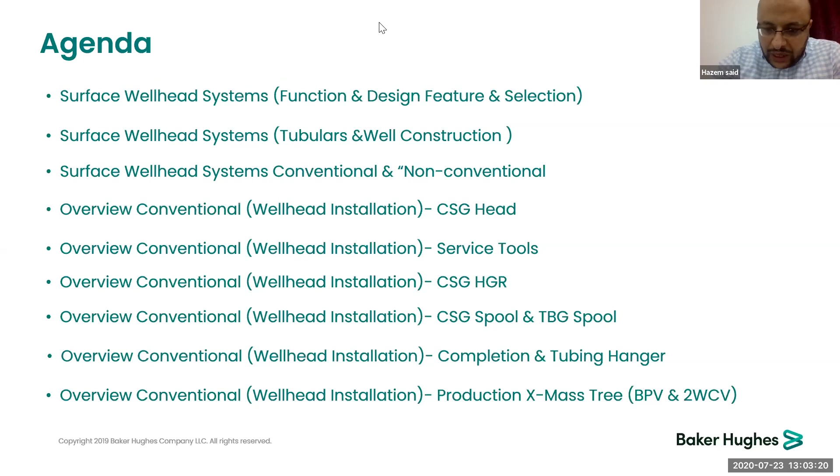So, surface wellhead system function and design feature. What is a surface pressure control, or what is a surface wellhead means? What does a surface wellhead look like? We have two main types of wellhead. We have something called surface wellhead, and we have another one called subsea wellhead. So the wellhead is whether it will be on the surface or it will be on the seabed.

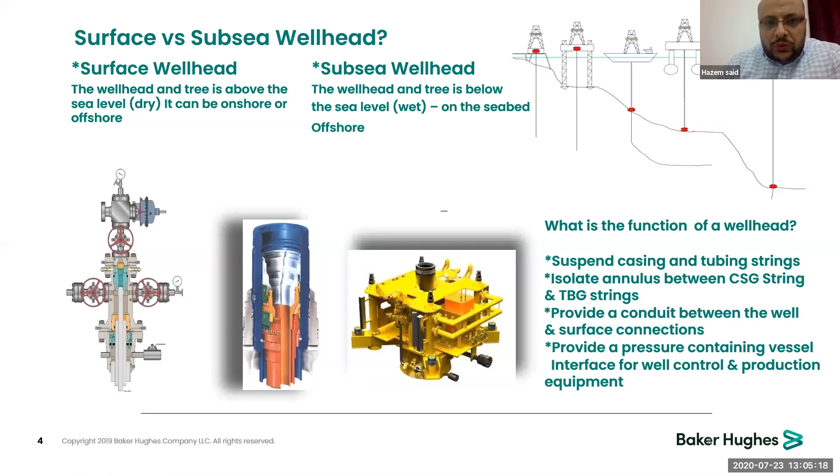What is the function of surface wellhead? The function is to suspend the casing and provide a conduit for surface connection, provide a pressure containing vessel interface for control and production equipment. So this is the main function of your wellhead. This is like a door for your home. You will not be able to go inside your drilled well without passing through this wellhead. So it's your door for your home. So this is what we see, or what we know, or what we try to call surface wellhead.

How does this wellhead look like? The wellhead has a design feature. You will know this wellhead by its feature. So the main design feature for wellhead, whether it will be flanged wellhead, like the one on the left-hand side, or clamped connection like the one on the right-hand side, you will find a clamped wellhead part. Or it will be multi-bowl wellhead, which is on the right-hand side, or stacked wellhead on the left-hand side, meaning that one by one you will find your wellhead. This is the first part, second part, third part, and we install it one by one. The multi-bowl means it will be one piece.

Whether we will find it's a slip hanger or mandrel hanger. Mandrel hanger usually is the one used into the multi-bowl wellhead. The slip type is the one used for the stacked wellhead. Even in some troubleshooting, we use this slip type hanger into the multi-bowl.

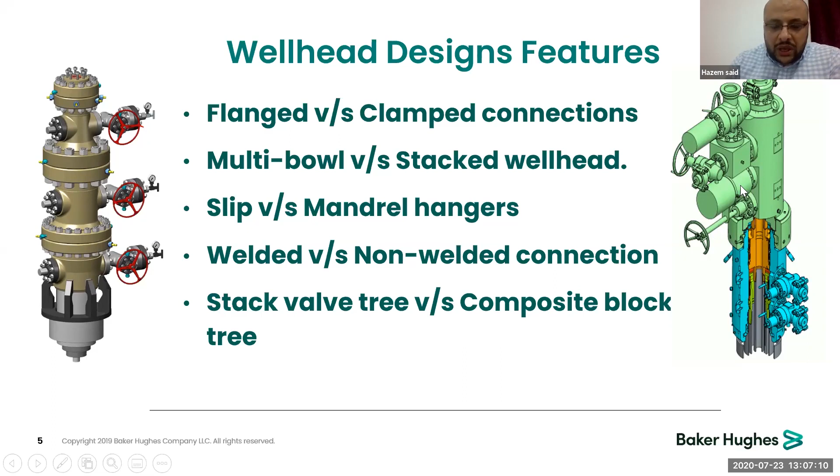We have also welded wellhead and non-welded connection. So there is some connection welded, and the other connection is non-welded as well. So you have the stack valve like this one, and we will understand what is a stack valve tree and composite block tree like this one. We will go through it while we go through the slide, inshallah.

So after the features, you need to understand one important thing: wellhead selection. What is it based on? Which basis do I need to know, or what criteria should I go through to decide the wellhead for my company or for a customer, whatsoever? So the selection is based on a lot of aspects here.

First, casing program. The casing program, which the customer or the company puts to drill the well, is one of your important data to decide your wellhead selection. What else? Weight and grade of this casing is very important to know while I choose my wellhead. What else? Total length of each casing - for how long I will drill each section of the well.

The bit program, anticipated produced fluid - all of this stuff, or all of these aspects, is very important while I choose my wellhead.

What else? Anticipated pore pressure. So you know each zone, or each pay zone, or each number of layers, has a certain pore pressure. This also needs to be understood, so you know where your casing is set, and that's why you will know what is the pressure rating for your wellhead - is it 3K? Is it 5K? Is it 10K? And so on.

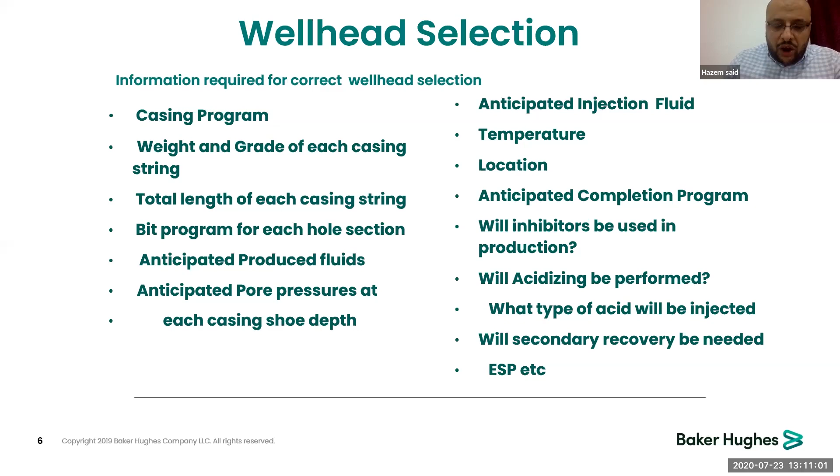So what else do I need to understand here? We will speak about tubular and well construction. These are the main three tubulars used in the oil and gas industry. The understanding of these three tubulars is very, very important for the surface wellhead industry, because it's associated with your wellhead, and your wellhead is connected - whether it's connected with this casing, or you run through this casing, or you seal around this casing.

Also, regarding the drill pipe, your running tool will be installed by this drill pipe or retrieved by this drill pipe. So you need to understand the weight, grades, connections, and lengths which you are dealing with, so you anticipate and put your wellhead design correctly from the beginning.

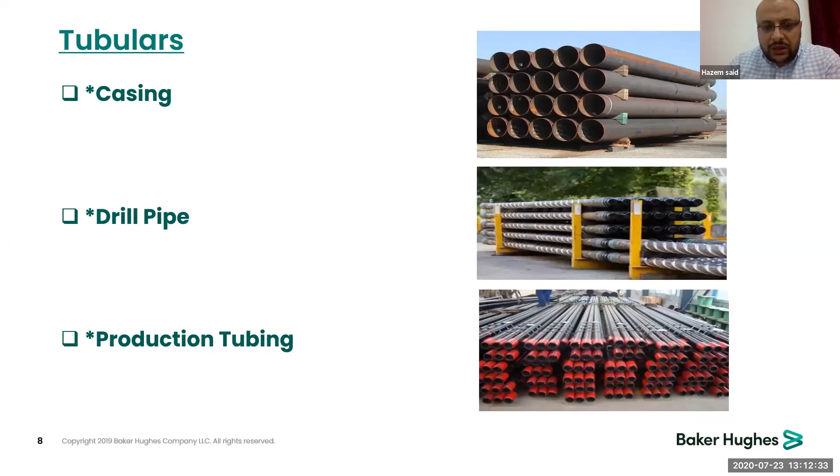Usually you start your well with conductor casing, which is a driver pipe. Then you go for the next phase with the surface casing. You need to understand this naming: conductor, surface casing, intermediate casing, and production casing. Why? Because each part of this casing will be attached to one part of the wellhead. Surface casing connects with a part of wellhead, intermediate casing connects with another part, and production casing connects with another part.

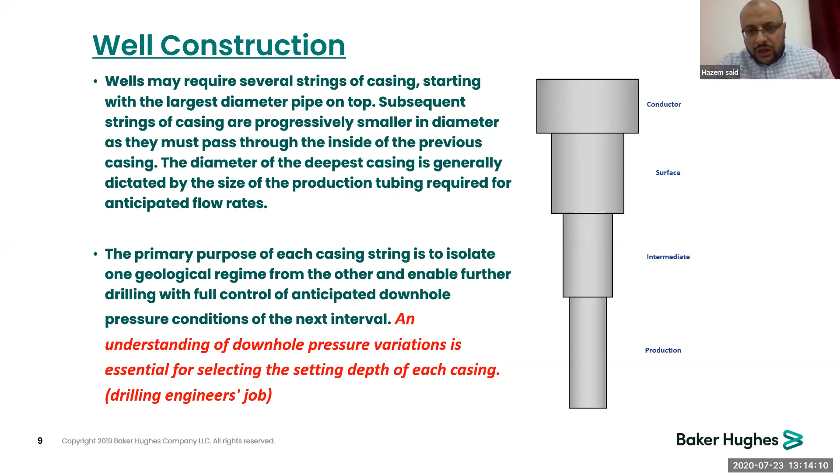We will see how we actually build the well through the wellhead, through drilling phases, because we do our well in phases: surface, intermediate, production, and set our casing. At this stage, we connect or add our wellhead part to this casing. That's why it's very important to understand what casing you're dealing with - the weight, grades, types, material, all of this - because it's very essential for the wellhead part.

In wellhead systems, you will hear about conventional wellhead and non-conventional wellhead. What does this mean? Conventional wellhead means it's a basic wellhead, like you see on the left-hand side. Each part of the wellhead will accommodate one casing string.

This part, called casing head housing, will accommodate surface casing. This part, called casing spool, will accommodate intermediate casing. This is tubing head spool, which will accommodate production casing, and so on.

While in non-conventional wellhead, your wellhead parts on the right-hand side will accommodate 2 or more casings in one go, in one port. If we focus here, you see this part has 2 casings - the surface casing and the intermediate casing - in one go, in one shot.

This is to stop manipulating the BOP, so you are not changing your BOP between each stage. I will explain, when we go for the overview, how this will look in the normal or stacked conventional wellhead versus the multi-bowl or non-conventional wellhead.

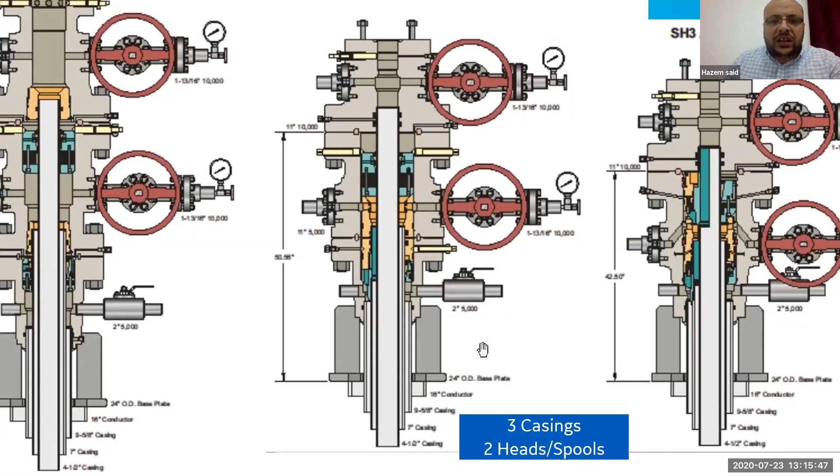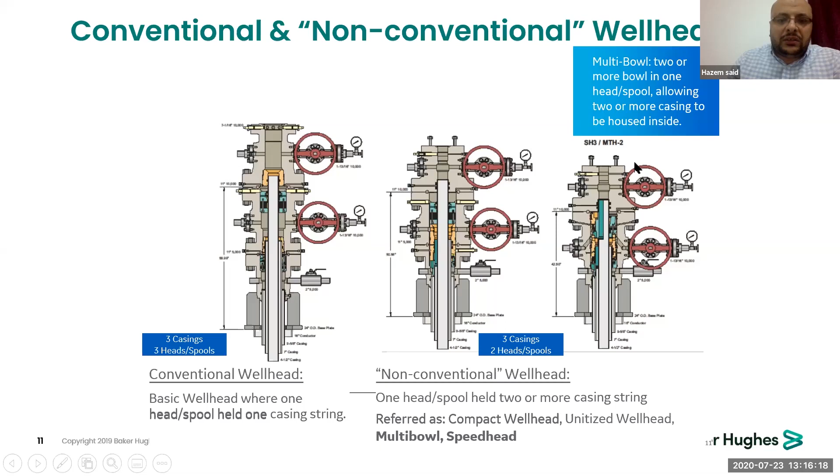So this is the main understanding of multi-bowl wellhead. There are other names also in the wellhead industry or oil and gas industry. We name this multi-bowl, compact wellhead, unitized wellhead, multi-bowl, speedhead - all of these names are known as multi-bowl wellhead, or non-conventional wellhead.

Conventional wellhead consists of these parts. This is the one usually installed in the majority of oil and gas companies. This is the old style - it started with the beginning of the oil and gas industry, and it still exists in a lot of countries. It's very suitable for oil wells or low cost wells, because multi-bowl is usually an expensive wellhead.

So what are the parts of this wellhead? We have the casing head, we have the casing hanger inside here, casing spool - this is the second part, secondary seal, internal here in the casing spool - tubing head spool, which is the last part on top. You have single tubing hanger or dual tubing hanger based on your pay zone, how many pay zones you have. As I mentioned, you need to anticipate the drilling program and some associated service tools. These are the main parts in conventional wellhead.

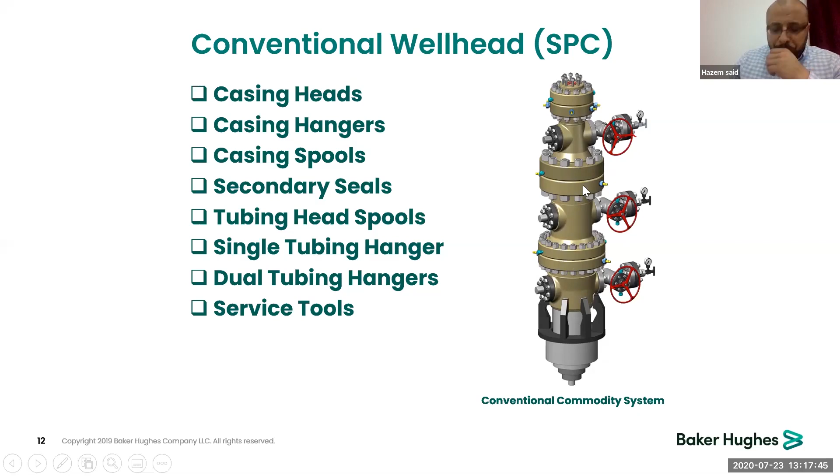So now we will go through an overview of conventional wellhead and wellhead installation. We will start with the first part, which is casing head, and this is the name of it. Now, where will my casing head be installed?

As you see here, how you start your well on the left-hand side, you start by digging the cellar, the one outside here. Usually your wellhead is similar to this. Your main wellhead part will be down the cellar and the Christmas tree at the ground level, as you see here, allowing the operator easy access to operate the Christmas tree for production, rather than having the wellhead on this ground.

On the ground, this operator would not be able to easily operate the Christmas tree and the production valves and all of this stuff. That's why all of this is important. So you can consider the cellar's function is to accommodate all the parts of the wellhead before you install the Christmas tree. This Christmas tree is the most famous part of the wellhead, and it's what the majority of people in oil and gas know about the wellhead. They only know about the Christmas tree, not what is inside below the ground level, because it's not noticeable at all.

So how do we start our well? As we mentioned, we are running our conductor pipe. This one is the conductor pipe, installed into the ground. How is it installed? Usually it's drivable, hammered into the ground, until it reaches something called the refusal point. When the conductor reaches the refusal point, I'll stop and continue building or drilling my well and installing the next part of the wellhead.

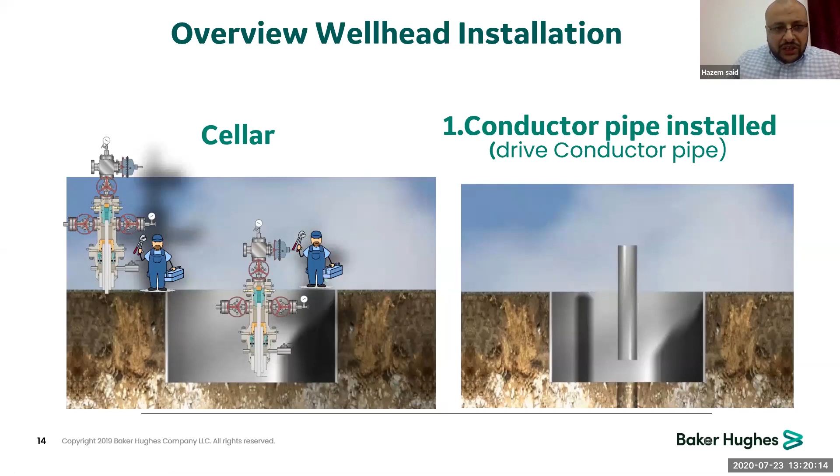So how does this look like? After I install the conductor pipe, I go drilling, same as on the left-hand side right here.

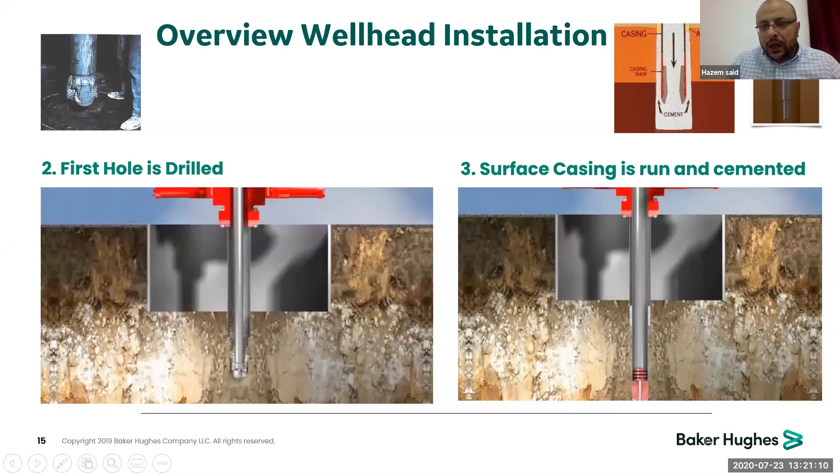We install surface casing, then we do a cement job. Once you cement your casing, you will remove this BOP. As you see here on top, this is the conductor, this is the surface casing, it's blue, the conductor casing. Once we finish the drilling and cement, we will cut the casing.

We will cut the casing and install the first part of the wellhead. This cut and arrangement actually has some mathematical aspects and some coordination with the rig side and the customer side. This is usually installed by field operations or a specialist for wellheads, who ensure this part of the wellhead is installed properly, using some specific techniques while installing this.

So once we cut the surface casing, we install the first part of the wellhead, which is called the casing head housing. There are other names for this casing head housing in the industry. It's called starting head, bradenhead, or section A. These are names which, when you hear them, mean the first part of the wellhead.

Don't confuse it - the wellhead is all the parts below. Which section are we speaking about? If we're speaking about section A, we're speaking about this part, the casing head housing. The function of this casing head housing - and this is the real casing head housing on the right-hand side - usually it has a side outlet like here, because you need access to this annulus to monitor the well and make sure that it's sealing properly.

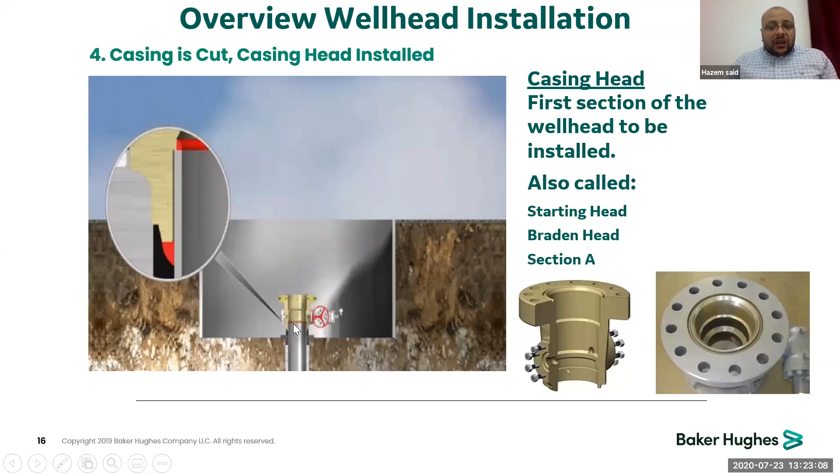How do we attach or connect this casing head housing with the casing after we finish the surface casing? Now, as you see, this is installed after the cement, because you are securing your well with this cement and removing your BOP to be able to install this part. So we have different types of attaching or connecting this casing head housing with the casing.

Whether it will be welded - you have slip-on weld, SOW, this is slip-on weld. Also there is something called slip-on weld with O-ring in some cases, but the majority is welded, because you weld this wellhead to the casing. This is how it's installed.

You weld this casing wellhead to the casing, or in some other application you connect this wellhead by threads, as you see here. So this is a different application rather than welded. What else? We also have other applications called connectors, slip lock, or sure lock, where you have a certain locking mechanism. There is a kind of segment, Allen keys and this stuff, to connect this casing head housing with the casing.

So there are three main styles: one, slip-on weld, so I weld the casing head to the casing; or I thread the casing head housing with the casing connections; or I cut the casing and it will be connected with another mechanism like slips. Some segment will go around this casing and attach onto it, and there will be a certain Allen key or stud engaged here, so it will be connected.

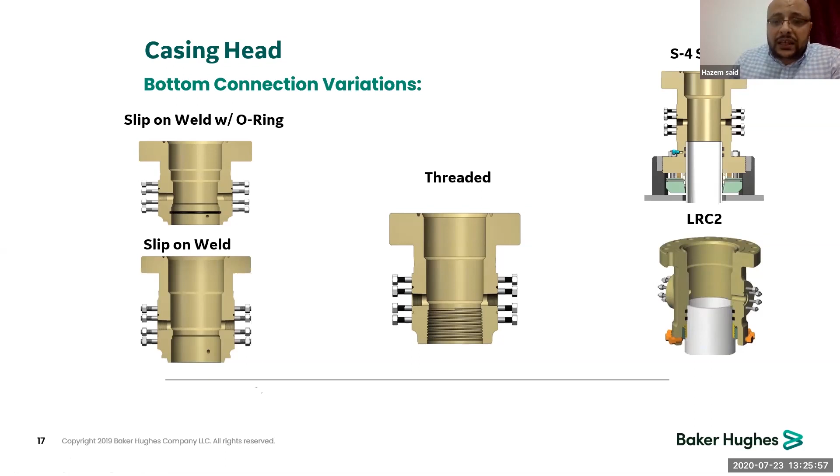What you see here is model LRC2 S-4 sure lock. This is just one model; you have a lot of models in the industry based on the manufacturer producing this equipment, but the methodology will be the same. It will be latch lock. You will not use any heat or thermal welding in this style.

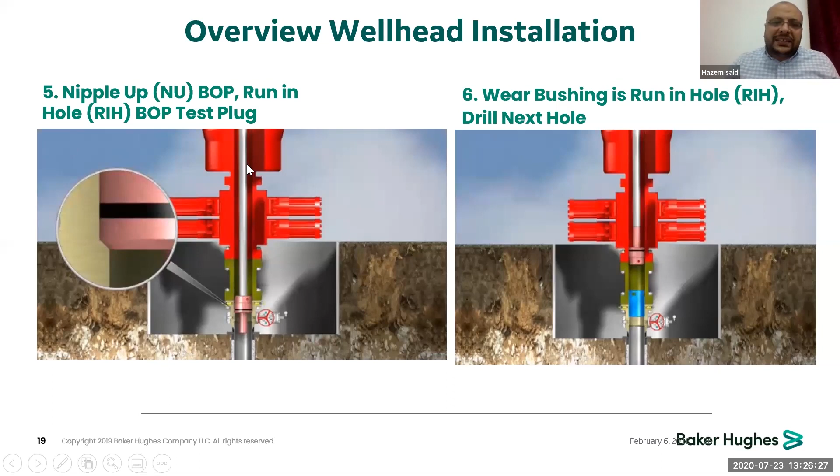Once we install this part, we are running, and we will need to return to continue our drilling phases. We weld our well and weld our wellhead. So now you're changing the phase. You need to put the part of the wellhead which will be attached. How does this happen? You will return the BOP onto your casing head housing.

And you need to check the integrity of this BOP. How do you check this integrity? You need to test the rams - shear rams, pipe rams, and so on. So there is a service tool called a test plug, as you see it here.

This test plug will sit into your wellhead. It means my wellhead will have the place where the test plug sits, so I can test this BOP and continue the drilling. I make sure of the integrity of this wellhead and BOP while drilling, so my drilling will be secure - there is no safety issue or well control issue.

So once we test this, we will need to install something called a wear bushing. It comes from its name - the wear bushing is used to secure this part of the casing head housing until you install the next phase, because we will install some part inside here.

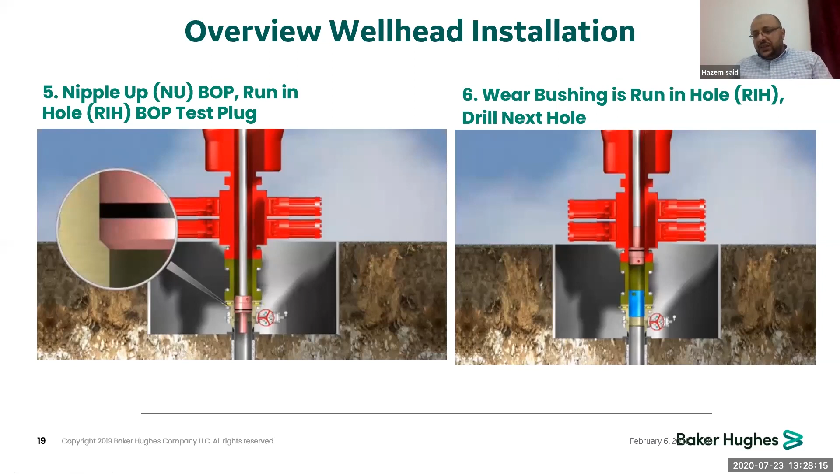So how do we install this wear bushing? In a lot of cases, your test plug is named a combination tool, or it performs another function, and you install this wear bushing with your test plug, leave it here, then remove the test plug. Why? Again, we put this wear bushing here to secure this area while we are drilling the next phase, which is intermediate casing or production casing as per the drilling program.

Here you see how this test plug looks. Your test plug usually has a drill pipe connection, and that's why I'm telling you from the beginning, this is the main tubular which you need to understand, because when designing this BOP or test plug BOP, it will be connected to the drill pipe. It will be run into the casing housing by drill pipe.

That's why you need to know what drill pipe is available. You will need a crossover, different connections - how it will be connected, how it will be installed, how it will be retrieved, and so on. So that's why it's very important. Where it will sit - again, it sits here. There will be a shoulder, usually in the majority of manufacturers at 45 degrees, to make this test plug set in place.

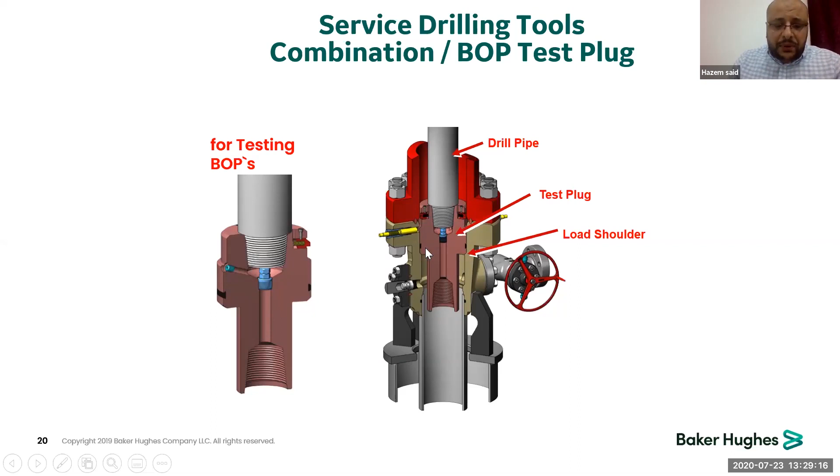And this is the wear bushing. After you test the BOP, you set your wear bushing. So you have your test plug here, and it will run here. This is your wear bushing. You flip it upside down, and it has something called a snap latch.

This is one style, by the way. There are many, many styles of this wear bushing based on the manufacturer. Again, in the industry we have many manufacturers - Baker Hughes, Schlumberger, FMC - many manufacturers for this one. So the methodology is the same.

You have a test plug, you have a wear bushing, regardless of the mechanism to install this, it will exist everywhere. You need to secure this part while you are drilling the next phase. This is how it looks like in reality. This is, for example, the seals, which will make a seal while you are testing your BOP, and this is the wear bushing itself. This needs to make sure it's compatible with each other. Each manufacturer has his own dimensions and own sizes for this test plug and wear bushing.

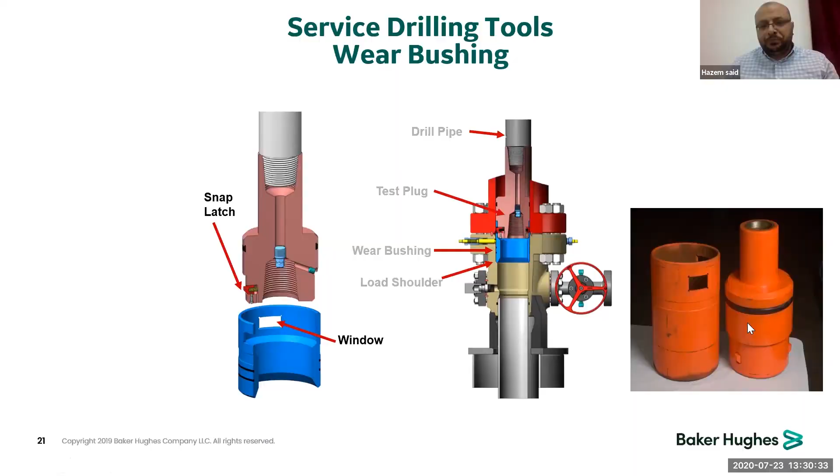And you will see here a zoom where the casing hanger will be sitting on the same shoulder for the test plug, if you remember, and here this seal will be sealing in this area, in the bowl. That's why we were securing this area by wear bushing until we install this casing hanger.

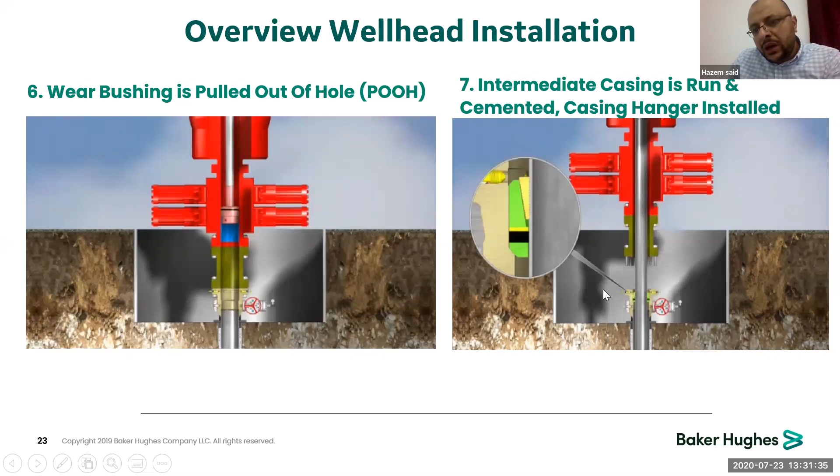How do we install this casing hanger? Usually we hang the BOP like you see here, hang only the BOP, and we put this casing hanger from below here. It's open on two sides, as you see here. So you can open it on two sides, and this is the usual standard in the majority of manufacturers. So whether it will be open on two sides like here, and then you connect it with a certain mechanism, or it will open hinged because it will be wrapped around the casing.

So what is the function of this casing hanger? It will support the casing weight, not the total casing weight, because the main supporter of your casing weight will be the cement. You are installing this casing hanger after the cement operation. After you drill, you install the casing, you cement your casing.

So this cement will seal your annulus, it will also accommodate the weight of the casing - the main supporter of the casing weight - and then you install your casing hanger part. So what are the main purposes of the casing hanger?

It's support, seal, center. These are the main three aspects: support, seal, center. It will provide support for the casing weight. It will seal the annulus between the supporting string and the previous string. So at each stage I install, it will create this sealing mechanism inside the wellhead. What else? Center the casing, because your well usually needs the casing centered. You put the casing hanger to center the well, and so on.

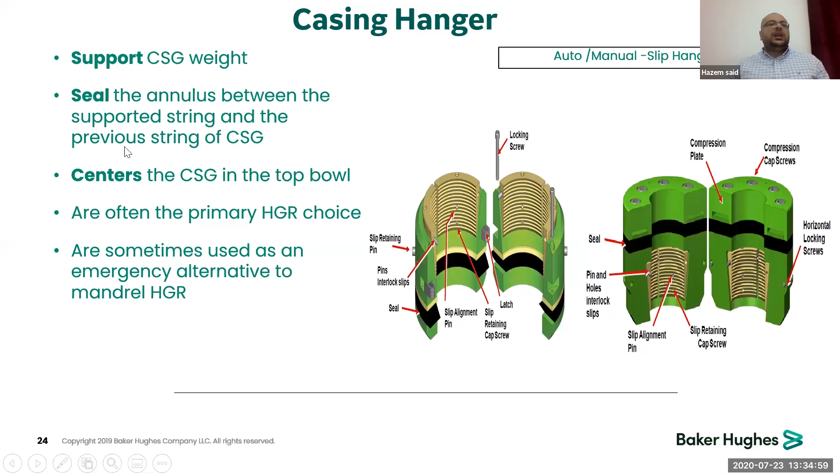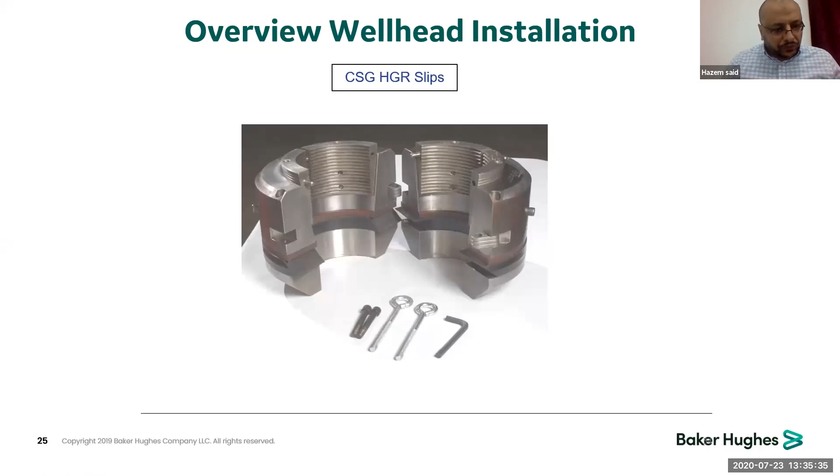So whatever we are seeing now is like a pretty standard application. You have the conductor, we have the surface casing connected to the casing head. We have now the intermediate casing connected, connecting with the casing spool, as you see here, after you install your casing hanger. So this is your second phase. Once we install the casing hanger, this one installed here, we make a connection here, connecting this casing spool with this casing head, and it will make a seal here.

How will it make a seal? It will make a seal with this part called the secondary seal. So any type of casing spool or even tubing spool, as we will see, has a kind of sealing mechanism here at its bottom, not like the casing head housing, if you remember, which is the first section. The first section is connected whether it's welded, threaded, sure lock, slip lock, or latch lock. This flange here will be connected to the casing head housing here, flange to flange, with a stud here and the ring gasket here. I'll explain that by the end of the session.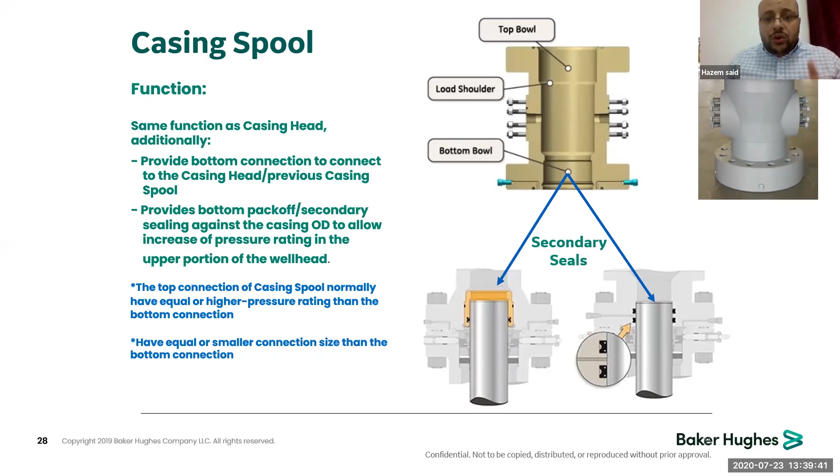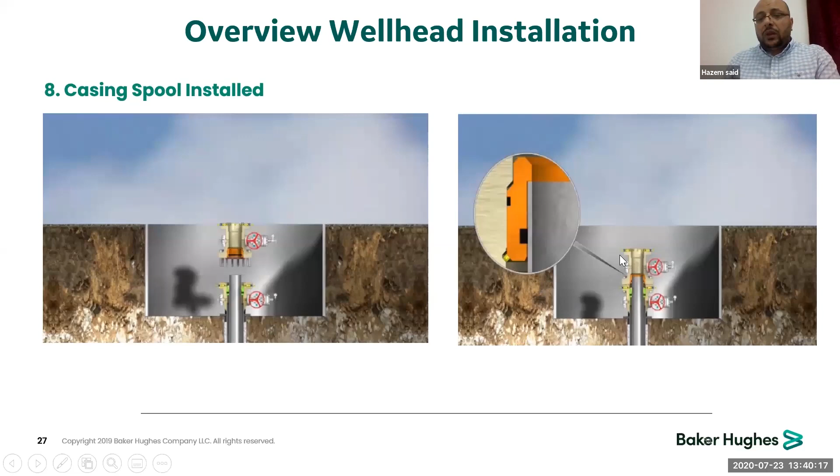What else do we need to cover? Now we install the casing spool, so we will repeat again what we did similarly for the casing head housing, because we now need to drill again for the new phase, or go deeper to install the production casing. What I need to do, because I removed the BOP, as you see here, I removed the BOP to install this one. I return the BOP back to drill. When I return this BOP back, I need to do similar to what I did for the casing head housing - I need to test.

I need to run the wear bushing. Similarly, test the plug to test the integrity of the BOP. The wear bushing secures this part until I install the next phase, or until I run the next phase.

So when you put the BOP here, maybe the BOP rating becomes higher because you go deeper. So you were using a 10K BOP, now you are using 15K or whatsoever. You need to understand this, because you usually put an adapter between the BOP and your wellhead to connect them.

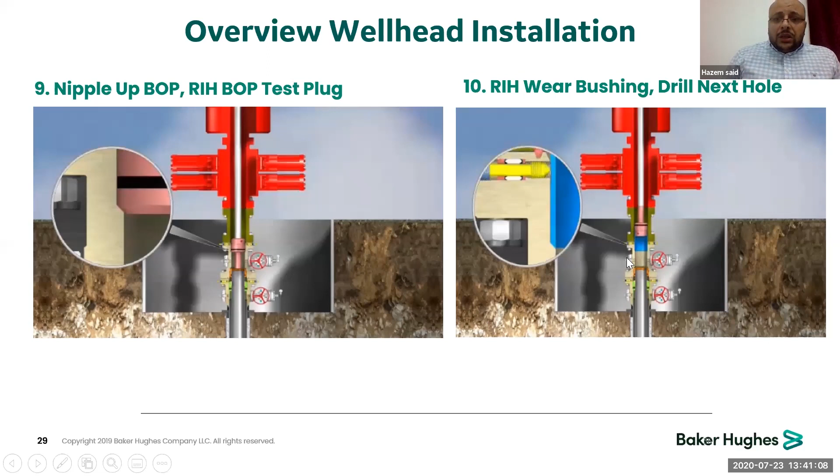So now we put our wear bushing, and we go to drill, install the production casing, cement the casing, and install the next phase, as you see here on the top part in this photo. This is conductor, this is surface casing, this is intermediate casing, this is production casing. This is how it goes while you are in the well. And each one of these is attached on top with your wellhead part, as you know.

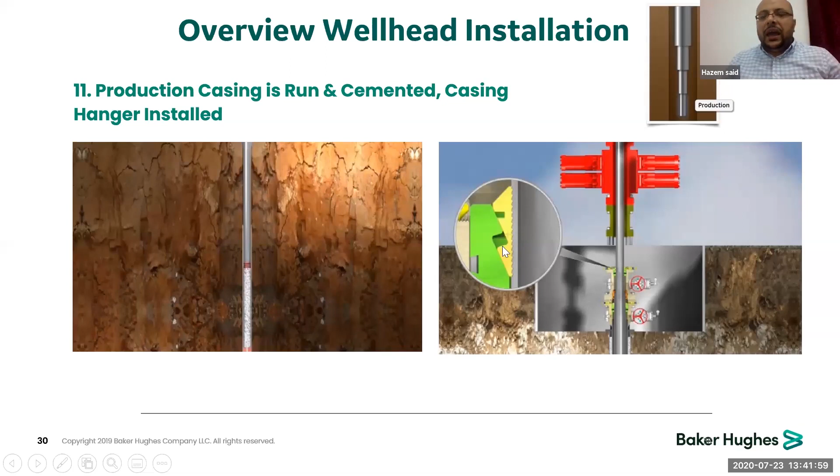Now we reach production casing. How will we install it? Similarly, we put the casing hanger, hang the BOP here, install the casing hanger again, and run similarly to install the tubing head spool. Once you install your casing hanger, you put the weight of the casing, cut the casing, and install this tubing head spool, similar to the casing head spool.

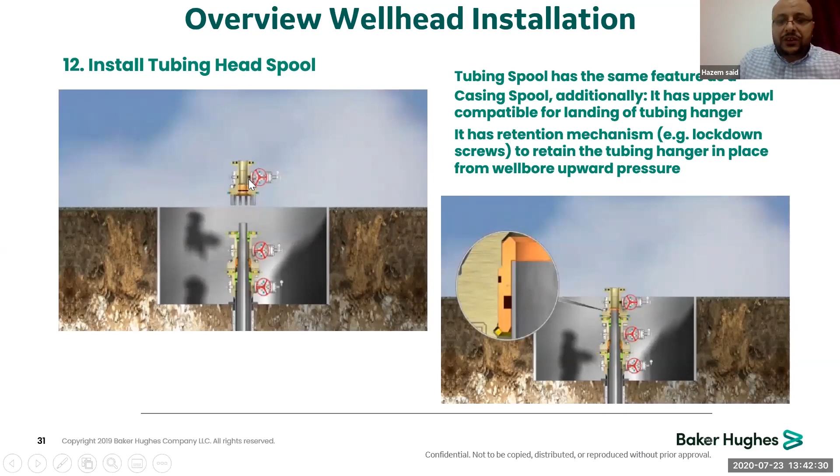How do I identify between the tubing head spool and casing head spool? It's a pretty similar mechanism or arrangement, however the pressure rating is different and some features are different. The main feature different here in the majority of applications now is something called the lockdown screw. You will find it here.

What you see here is not a standard sealing mechanism, this is just one of the examples. But you identify the tubing head spool usually by this lockdown screw. Some high-tech and new technology now has something called the internal latch, where we are not using this type of lockdown screw, but that will be another topic, not one we are covering here.

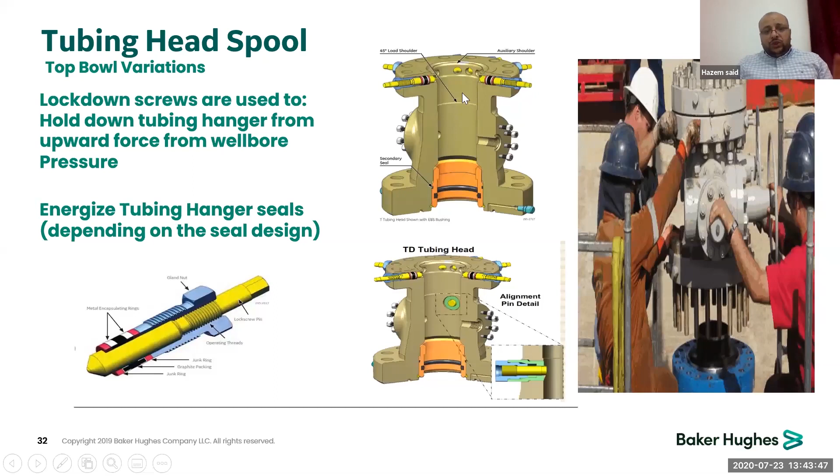So for the tubing spool, whether we are installing the standard tubing spool or the tubing spool for dual completion, you are installing your tubing hanger in this area. Whether your tubing spool will accommodate one tubing hanger or a dual tubing hanger, how this will look, I'll show you in the next slide.

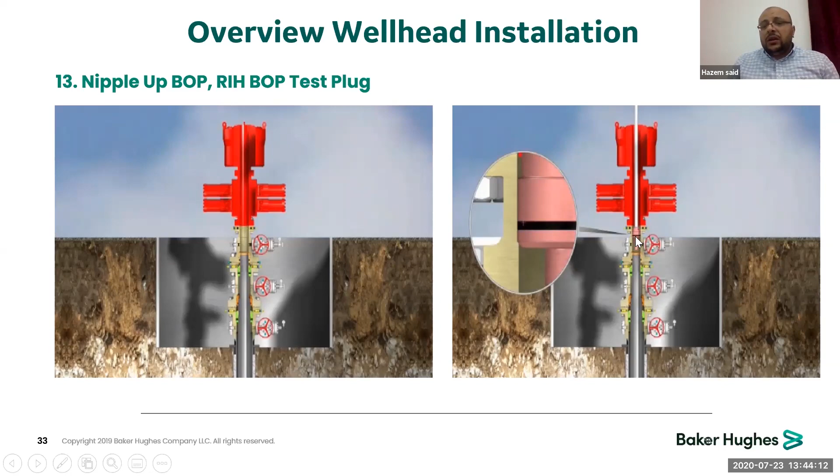So once you install your casing and your tubing head spool, you need to do similarly what we did before - return the BOP so we can install the completion phase. So we return back the BOP, test the BOP, remove the wear bushing, secure the well, and go to completion and tubing hanger. And this is how it looks like.

So before we install the completion, we are removing the wear bushing, as you see here, and we install the completion assembly. We have many styles of completion. If you're covering the sessions, I saw that you covered a lot of sessions about completion in these webinars, so we have many different styles for this completion. Also, it's not our topic today, but this is one of these as well.

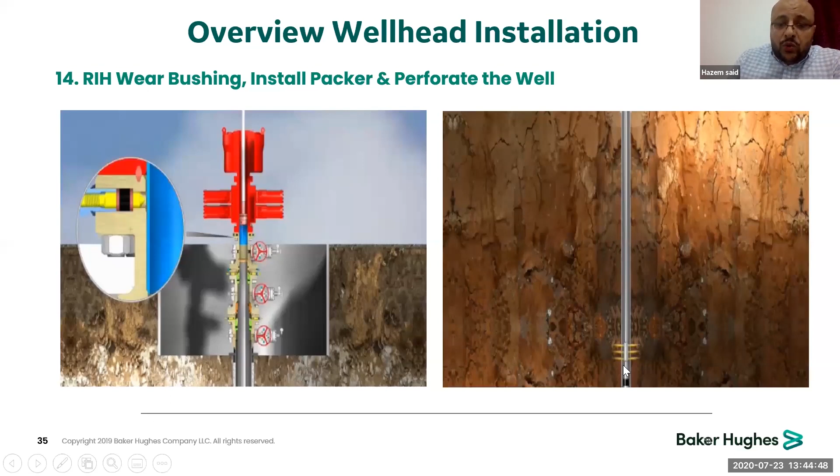So once we install the completion string, by the end of the completion string, we will connect our tubing hanger here. This is the one which will produce. This is the third tubular, if you remember, which we spoke about, which will be connected to our tubing hanger.

The production tubing will be connected to the tubing hanger from bottom, as you see here. We install this tubing hanger in this place, then engage this lockdown screw and some application to seal here, and for some style of hanger you seal here. Usually your tubing hanger has a profile here for something called the back pressure valve.

This thread here is your landing thread for this tubing hanger. Once you install the tubing hanger, you almost finish your well. If you will produce, we will continue how it will produce, but in some applications only the customer, or only companies or production companies, run the tubing hanger and make a DST or drill stem test or other applications. They test the wells and do whatever applications they need without installing the Christmas tree. In other applications, they run the Christmas tree, and this is what we will see in the next slide.

So how does the tubing hanger look like? This is how the tubing hanger looks, and this is connecting with the tubing string, as you see. As we mentioned in the tubing spool, whether you will install the tubing spool for single completion or for dual completion, like you see here on the right hand side, this is a segmented tubing hanger, 2 parts. This is single completion, 1 part.

In single completion, you are producing from 1 pay zone. In dual completion, you are producing from two pay zones. Only this part, the tubing spool, needs to have some adjustment or arrangement to accommodate whether single or dual, as you see here - this is 1, this is 2.

In some applications, in your tubing hanger you will find a control line like this. What is the purpose of this control line? To open something usually called the subsurface safety valve, used in offshore applications and gas wells, even in some other applications. This tubing hanger can have more than 6 control lines for smart completion.

As I mentioned, there are too many styles of completion, so that's why you have too many styles of hanger to accommodate this requirement while installing your tubing hanger into your spool. What else do you need to know?

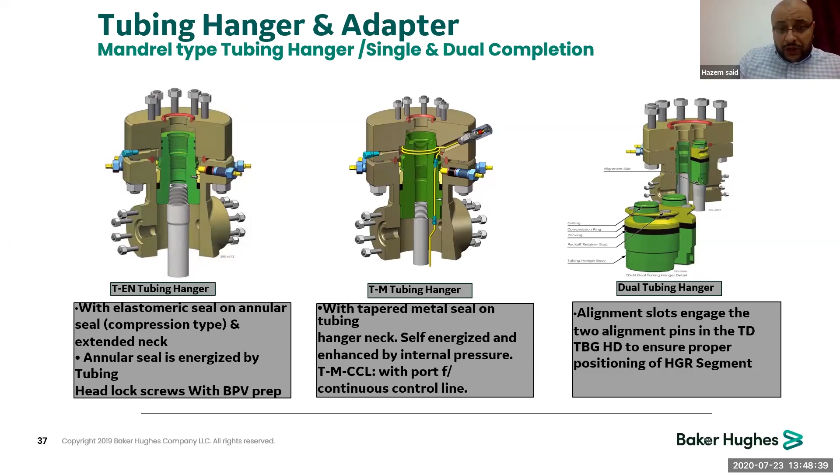This is the extended neck hanger - the hanger neck is extended. Here the hanger neck has a metal seal. Here the hanger neck is dual. It depends on the application - you have many manufacturers, but the style is the same. The control line to open the completion subsurface safety valve, or to open downhole gauges, or to do anything, will be the same and exists everywhere in every application.

So for the customer who continues with installing the production Christmas tree, you will need to understand the next steps. Once we finish installing the tubing hanger, as you see, we install the tubing hanger through the BOP. Once we install the tubing hanger, we need to remove or nipple down this BOP and install our Christmas tree.

How will this happen? We need to lock or block the well. Although you put any kind of plugs, wireline plugs, and all of this stuff through this tubing hanger, you need to run this kind of back pressure valve - this kind of valve is called a back pressure valve. What you see here is the standard one, called H type.

There are many styles of back pressure valves also - there's K plug, F plug, and different types of this, but this is the major standard one. You will find it in 90% of back pressure valve applications for tubing hangers. That's why the majority of manufacturers make this thread here for this back pressure valve.

This back pressure valve is like a check valve, and usually it's in a closed position, as you see, because we install it to close here so we can nipple down the BOP and put our Christmas tree or production tree into here. This back pressure valve, as you see here, has a part called a poppet, and this poppet, once it has any pressure from the top, it can open, but from the bottom it wouldn't open anyway. So you still can inject any fluid into the well while installing this back pressure valve.

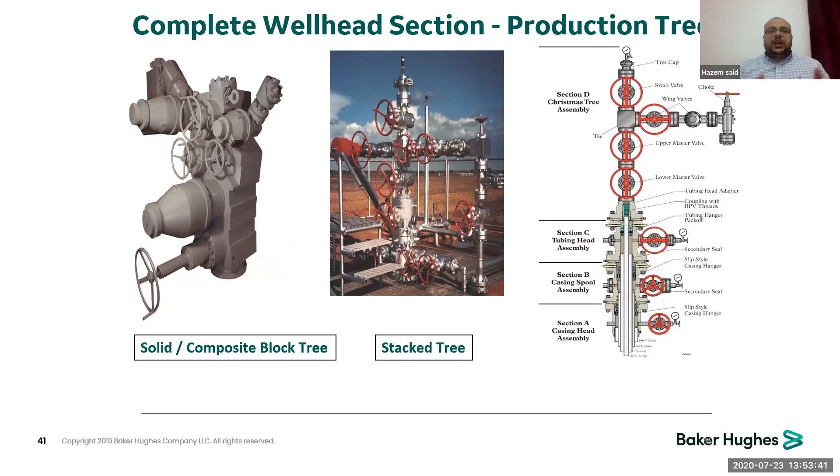What I need to understand about the main parts of the Christmas tree: any Christmas tree has the following - the adapter, tubing head adapter, which accommodates the tubing hanger, so the neck of the tubing hanger will be here. This tubing head adapter is sometimes also called the tubing bonnet. So the tubing head adapter is called bonnet by some customers or people in the industry, but they mean the same part.

What you need to understand here: this is the lowest valve, called the lower master valve, LMV. And here is the upper master valve, which is your second valve, above the lower master valve, and this is your tee. Here you have the wing valve or production valve. In another application, you have another valve called the kill wing valve. In another application, some customers put an actuated valve here, which uses another force to open or close the valve, and the choke, which regulates the production. And you have the swab valve on top of your Christmas tree, and you have the tree cap.

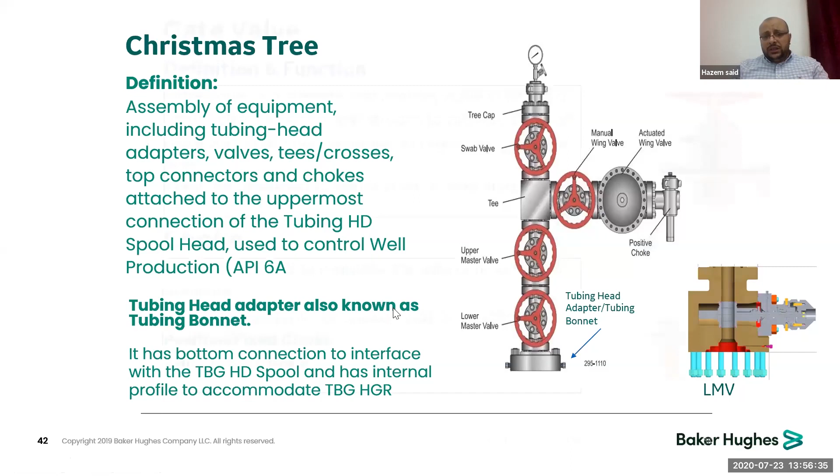Speaking about the Christmas tree, you can't not speak about the gate valve, which is the main part of the Christmas tree itself. The valve we are speaking about is called the gate valve, where the motion of it is a straight line motion, like you see here, 90 degrees, straight line motion.

What is the function of this valve? The gate valve is used to stop the fluid completely or open completely. You can't operate this valve partially open. It will make a wear in this part, the blue part, which is called the gate. This part is called the seat, for example. If you put it in a halfway position, it will be worn out. So the gate valve is mainly to open or close.

So how do we control the fluid or control the production? By this kind of valve, called chokes. So chokes are another part of our wellhead, as you see here. You might use this choke only in the evaluation phases or drilling phases to evaluate the fluid, production, and all of this stuff. This choke valve is used to regulate or throttle the fluid.

There are two main types of choke valves: positive or fixed chokes, where you have a specific bean with a specific size to have your flow through it, or adjustable choke, which usually has a hand wheel to regulate the production when you are making the evaluation for the well. What is the optimum flow rate to produce? What is the minimum flow rate? What is the shut-in? You usually use this kind of choke valve, called the adjustable choke, for that.

We will cover some other part here, called the API flange. We see how our wellhead is connected, so we speak about flanged connection, or section by section, or stacked connection. We can't speak about this without speaking about the API ring joint gasket, or ring gasket.

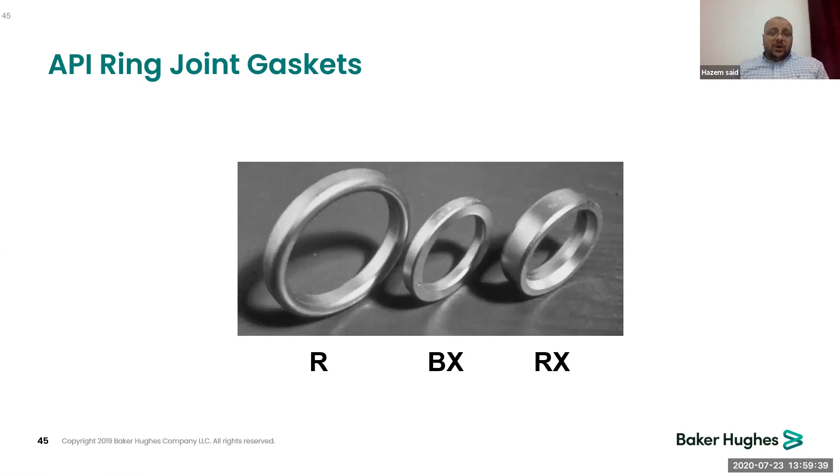You have three main types of gaskets: R, BX, or RX. R and RX usually replace each other, but BX does not replace them, because it fits in a different groove than R and RX, as we will see in the next slide.

So what is the R ring gasket? The R ring gasket, as you see here, is like a rounded shape gasket. This is a metal gasket. What is the function of this metal gasket? We mentioned putting a wellhead on a wellhead, or a BOP on a wellhead, or whatsoever. How is this connected? How does this make a seal? It's a metal part here and a metal part here.

There is a certain mechanism to seal these two flanges, or two metal parts here. You have this kind of gasket, or metal gasket, to put in a certain groove here. Then, with a certain torque for this stud and nut - this is called the stud, and this is called the nut - you are torquing the stud for a certain torque, giving a certain force, and when it reaches the required force, this R gasket will be crushed, because this kind of gasket is a crushing type, and it will make a seal.

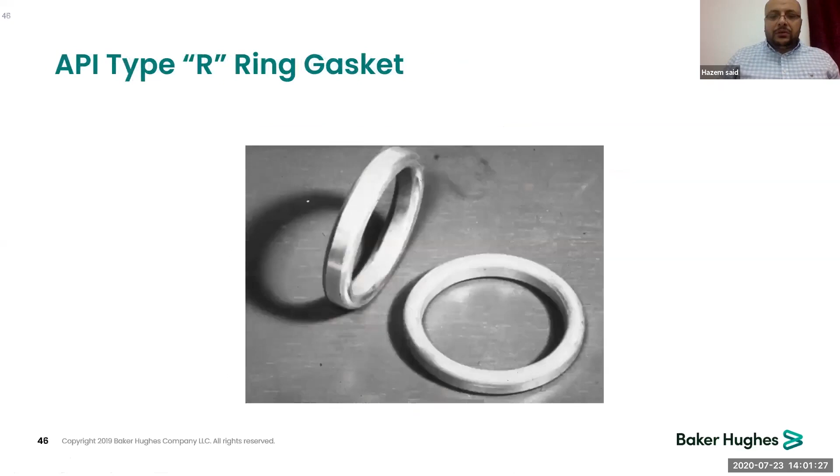Usually you will find a small gap here between the two flanges where you are able to see this kind of flange, and your gasket will make a seal into the groove for the wellhead. If you remember, here this is a gasket, for example - this is a gasket, this is a gasket, this is a gasket. All flanges, even if we're having a BOP here, when you connect this with this, you're having a gasket as well. So the understanding of this gasket is very important.

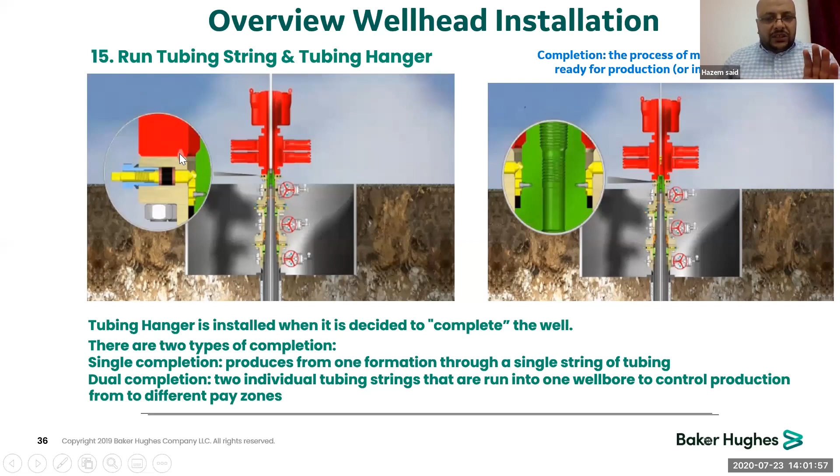What you see here is a type of this gasket - it's the R one I just referred to. The R is for low application. It's crushed - it's energized by compression. Once you compress this stud and nut, it's compressed, and it will make a seal once you give torque to the stud and nut. What else?

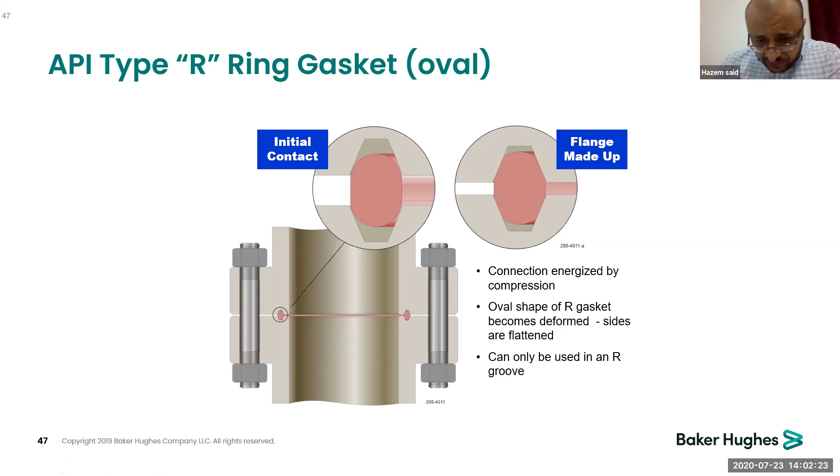This RX gasket, which you will find also in our application, is not rounded like a rectangle. It has a bevel part from inside, and it's a little bit wider. It's not rounded or rectangle.

There is a bevel from inside here and here, and this is how it will seal. It will be sealing by compression. Once you are installing here, it will be sealing by compression.

It will assist by pressure as well. So when you are pressurizing inside here, this ring gasket will be touched here, and it will make additional sealing. It will be a pressure energized seal ring. So once it's crushed, it's compressed or energized by compression, and it will be pressure energized, making additional or extra seal.

So R and RX go for the groove called 6B. Both are replaceable, you can install R or RX. RX usually has a higher gap rather than R. Both of them are usually used for low application pressure, 5K and so on.

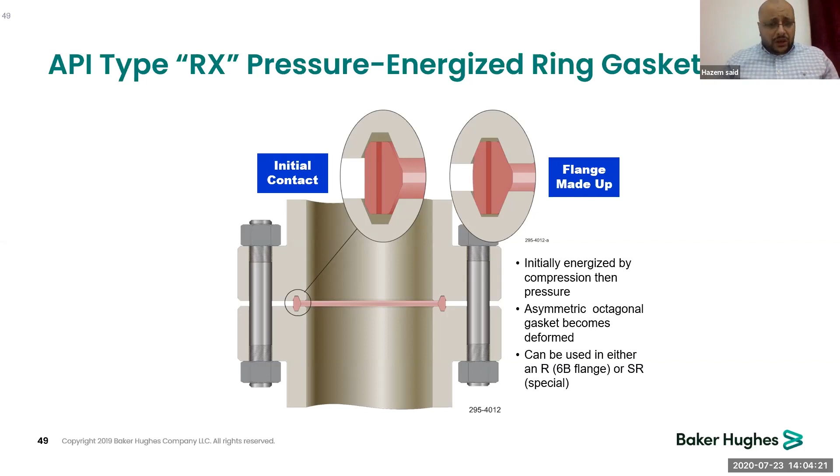What else? The last type of gasket is BX ring gasket, and it's like a flat gasket, as you see here. It has a rectangle cross section.

Usually has a hole here to vent the pressure, because this kind of BX gasket makes something called face-to-face seal. There is no gap between flange, as you see here. There is no gap.

Once you install, it's similar to the RX. Once you give a torque for this stud and nuts, it will be compressed or crushed, but also it will be pressure energized. But it's not replacing the other two, because the groove is different. The groove here is called 6BX, not 6B for R and RX.

Also, once you pressurize your wellhead or your connection, it will make additional seal because it's assisted or pressure energized by that.

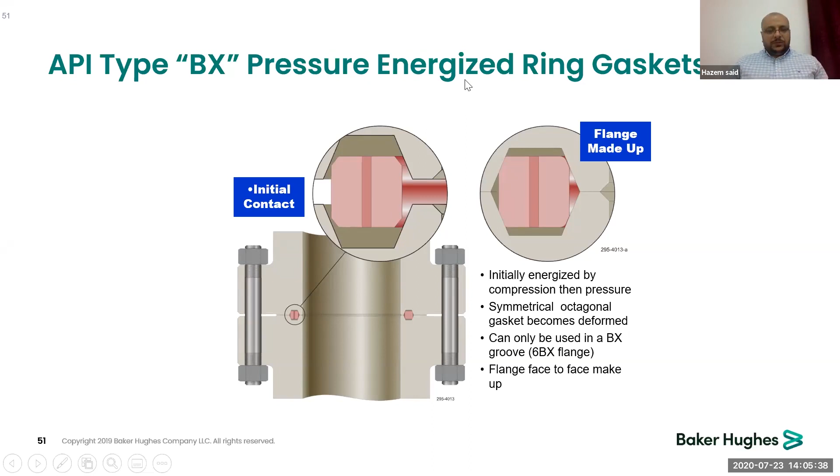So this is how it will look when you connect any two connections. You have your studs with a certain torque and so on. Here you have R or RX, which runs in 6B and is rated for 5K. Here, rated for 20K, BX rated for 20K, which makes face-to-face sealing rated to 20K.

And it makes face-to-face seal here. And you will not be able to see the gasket itself between the two flanges. You still can see the R or RX, but you can't see the BX because of the groove. It's a different groove.

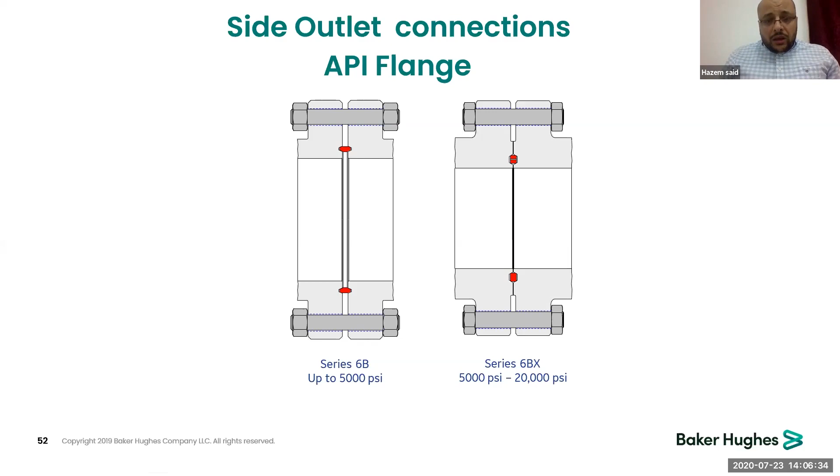With this said, I hope you enjoyed the session. Hopefully I'm not rushing. So I'm open to any questions, and there will be a kind of quiz for the session as well.